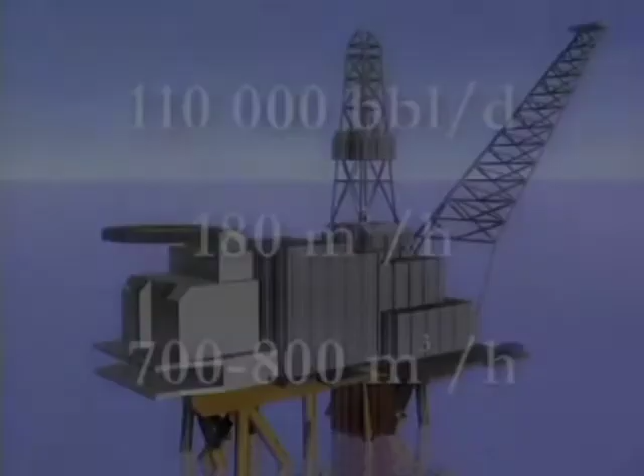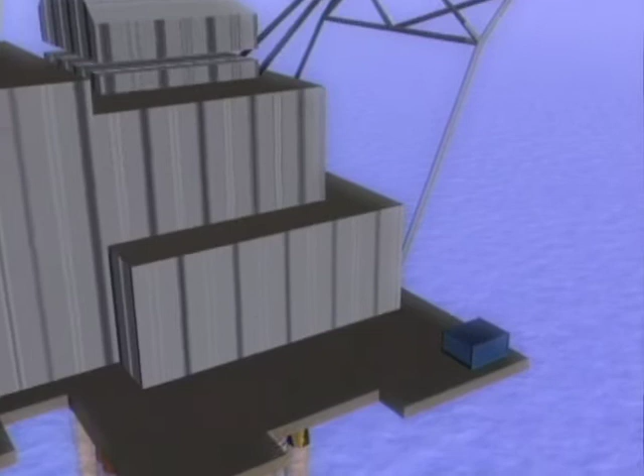Today, this so-called production water is given a coarse cleansing after primary separation of oil and water and pumped directly to sea. Such water, still containing fractions of oil, gas, particles and various chemicals, will be pumped to the EPCON plant for a final cleansing.

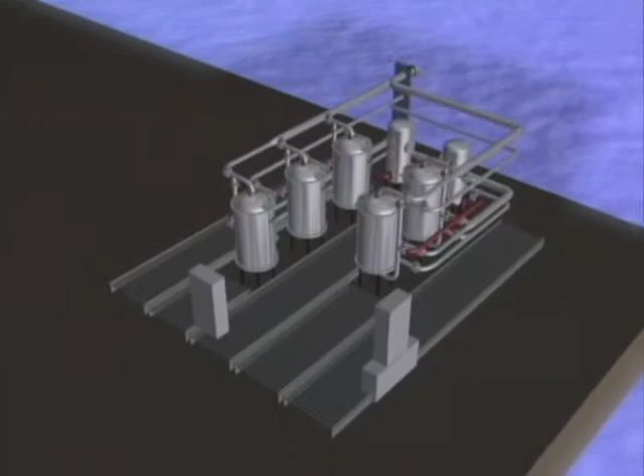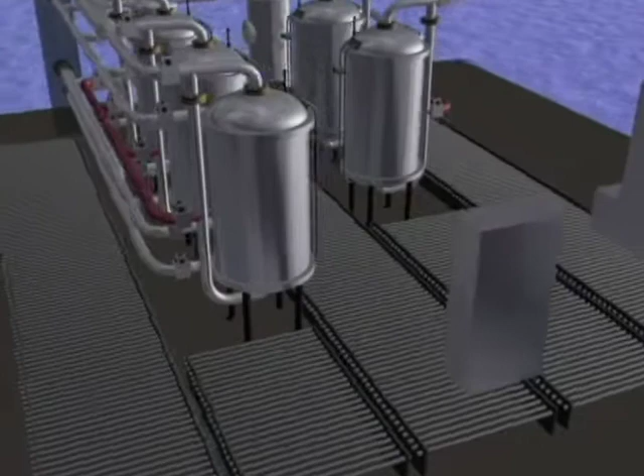The EPCON plant consists of a number of EPCON cleansing modules, dimensioned to fit the actual cleansing demand. Steam boilers are included to produce the steam necessary for the backwashing and regenerating of spent EPCON modules. Remote control and monitoring is made simple with a fully automatic PLS control system.

Inside the EPCON module, 3 different cleansing processes happen in sequence. First, there is a process of flotation. At this point, the major volumes of free oil and chemicals are removed from the outer chamber and pumped directly to a collection tank. At this stage, one also achieves a removal of saturated gas bubbles.

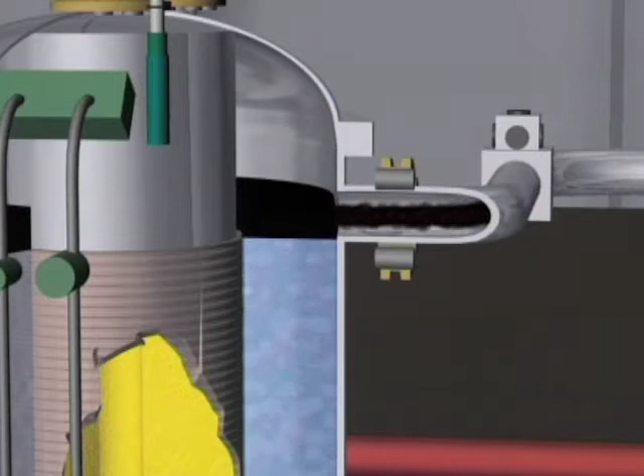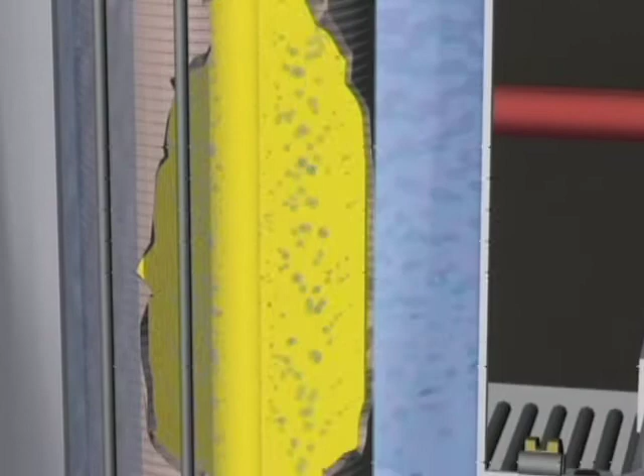The next step is a mechanical filtration by means of pumping the water through the finely meshed strainer cylinders. At this point, there will be a build-up of oil and sludge into a filter cake on the outside of the strainer cylinder. The last step is a final polish of the water through the EPCON filter medium situated in between the 2 strainer cylinders.

At this stage, particles down to a size of less than 1 micron are removed. Such particles may include heavy metals and radioactive matter. Also at this point, there is an absorption of remaining free oil and finely dispersed hydrocarbons.

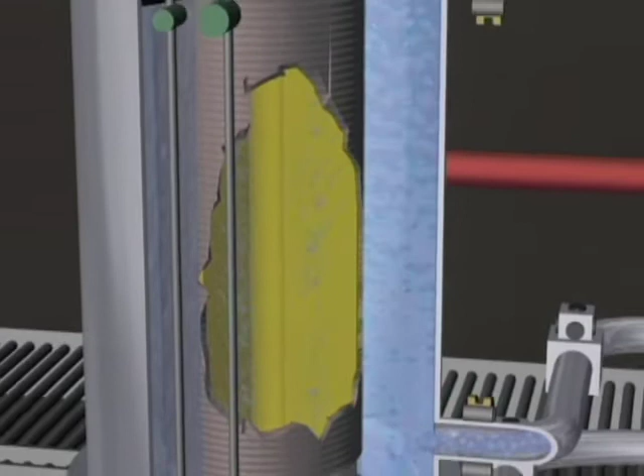Normally, each module is regenerated once per 24 hours. First step to achieve this, the water is drained out of the flotation chamber and pumped to the collection tank. Next step is backwashing with superheated steam under high pressure in order to remove the pollutants trapped inside the filter medium. The resultant backwashing water is also pumped to the collection tank.

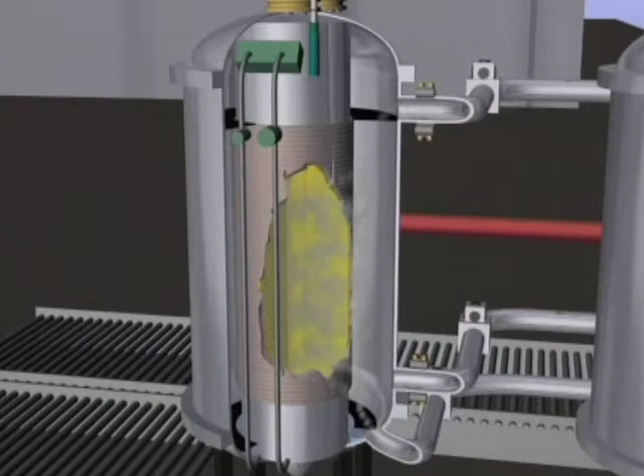The complete process takes about 2 to 3 minutes and is performed in such a way that the treatment process is maintained. From the collection tank, where one achieves a gravimetric separation of oil and water phases, the water phase is pumped back to the EPCON cleansing module, whereas the oil phase is taken care of separately.

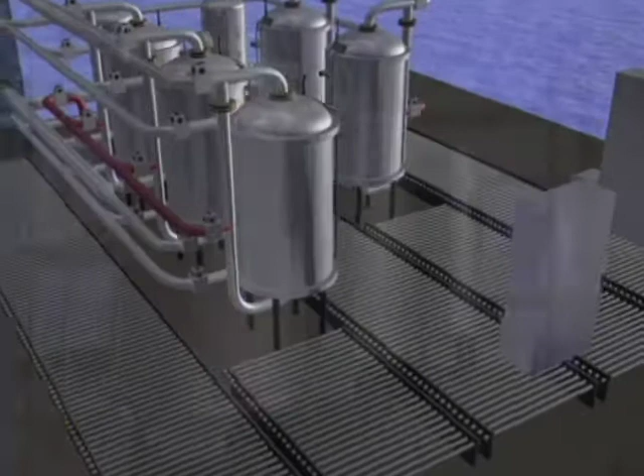The EPCON technology results in large savings for the oil production offshore. This is due to the fact that the system makes it largely unnecessary to use emulsion-breaking chemicals, flocculants, etc. to achieve good separation of oil and water phases. This situation will also reduce the pollutant effluence of chemicals into the sea considerably.

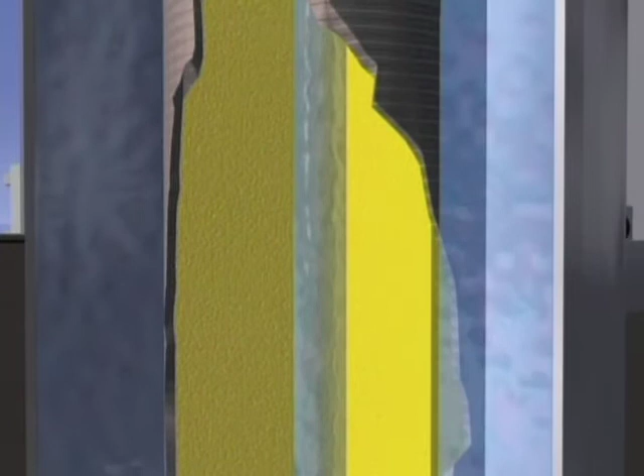Compared with traditional cleansing technologies, the EPCON solution offers considerable savings with respect to space requirement, investment and operating costs. More than 15 years of research, testing and development lies behind this unique cleansing technology.

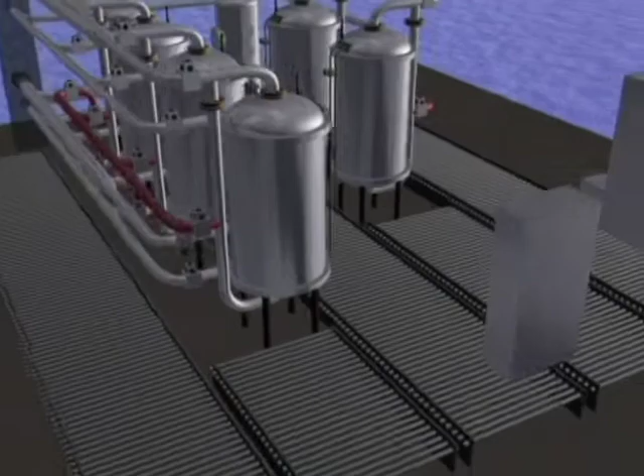The EPCON solution is especially well suited to situations where large volumes of polluted water have to be cleansed quickly at a limited space. The enormous cleansing capacity, together with the fully automatic and secure operation, and coupled with low operating cost, make the EPCON technology unique in the world.

The cleansing capability assures the compliance with new effluent standards, from today's 40 ppm down to 5 ppm of oil in water. The ultimate result of this is longer life to existing oil fields. The most important gain of the EPCON technology, besides the economic one, is nature's gain.